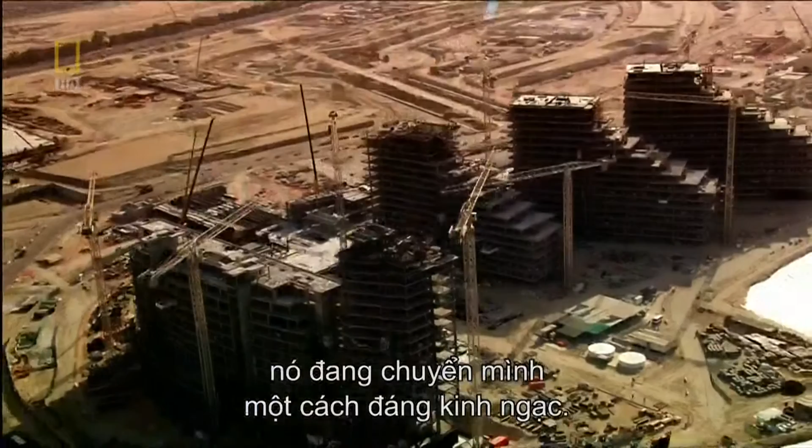Abu Dhabi, the richest city on the planet. It wants to join the City Super League and is undertaking an incredible transformation, building this extraordinary skyscraper, Aldar HQ. Nothing like it has ever been attempted. It'll be a race against the clock. Will this megastructure push even Abu Dhabi to the limit?

Abu Dhabi is in the midst of a construction boom. It's the largest of 7 sheikhdoms known as the United Arab Emirates. Its capital, also called Abu Dhabi, is the richest city on earth. Its ruler, Sheikh Khalifa, has a cool $875 billion in the bank and an audacious spending strategy to match. He wants to transform the skyline and compete with the international elite of London, New York, and Hong Kong.

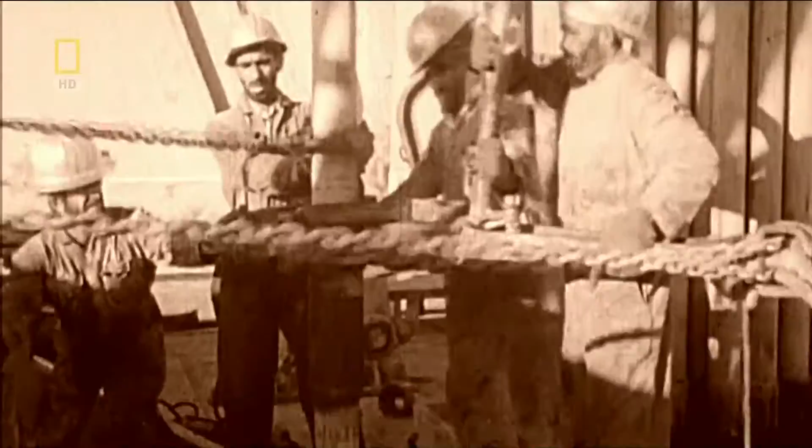But this is not the first time the Emirate has stood at the crossroads. Just decades ago, Abu Dhabi was a desert backwater, until the discovery of oil in 1958 brought unimaginable riches to its ruler, Sheikh Zayed. As the petrodollars flowed in, he converted the shell houses into high-rise, and the traditional way of life was swept away. Today, Abu Dhabi is a thriving metropolis, sitting atop the world's 5th largest oil reserve. But black gold alone cannot put this city in the Super League. To do that, Sheikh Khalifa must lure big business and tourist dollars. Abu Dhabi must expand to thrive.

To put Abu Dhabi on the world map, fledgling property developers Aldar plan a whole new micro-city, Al Raha Beach. It's an ambitious proposal. At 11 kilometers long and almost a kilometer wide, this city on the sea will be the biggest project ever attempted in Abu Dhabi's history. Mohammed Al Mubarak is in charge of delivering this audacious development. The vision of their highnesses and the vision of Aldar was to create this almost mini city where people can live, study, play, and work in one destination.

Al Mubarak must attract investors if Al Raha Beach is to succeed. So to launch the project, he commissions a signature skyscraper. Creating an iconic structure on Al Raha Beach was of vast importance on basically putting Al Raha Beach on the world map. Al Mubarak sets Lebanese architect Marwan Zgheib the task of designing an icon that raises the stakes even higher. The building will become Aldar's headquarters in the heart of their colossal development.

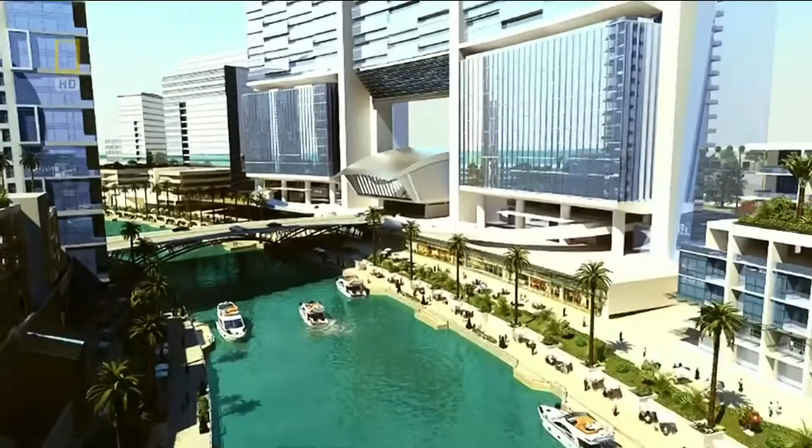But creating something new in a land where the iconic is the everyday won't be easy. Neighboring Emirate Dubai has taken center stage with a number of headline-hitting projects. The world's tallest skyscraper, Burj Khalifa, the Palm, and the World, and the emblematic Burj Al Arab. To stand out from the crowd, Zgheib knows he must redefine the extraordinary. Simple can be powerful sometimes, especially in architecture. You can see it since the pyramids of Egypt. Most of the iconic buildings are very simple buildings.

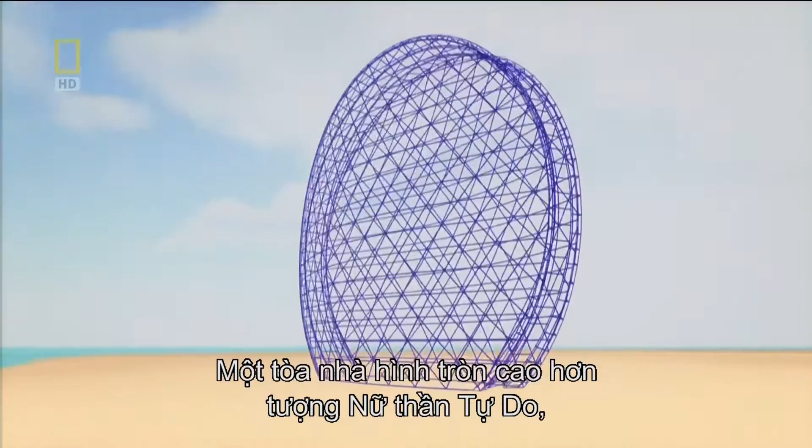But it isn't until Zgheib is relaxing on a plane that he has a brainwave. But I couldn't sleep, so it was a moment of relaxation, you know. And then the idea came simply. So I took a pen and I drew it on a sketchbook. The design is simple but daring. A round skyscraper taller than the Statue of Liberty, with a curved glass skin covering the area of 4 football fields. To be honest with you, the moment I imagined it, I knew it was a winning concept. I knew it was something different.

In fact, the design is so unusual, Al Mubarak initially doesn't know how to react. And when I first looked at the MZ design, I was a bit confused in the beginning, to be honest with you. I felt like I was looking at a comic. I felt that this was a flying saucer and basically it landed on Al Raha Beach. And I just kept on staring at it for like another 15 minutes. And after 15 minutes, I just fell in love with it.

Zgheib's design is inspired by nature. 2 giant circular curved walls of glass mirror an open clamshell. Architecture is nothing but imitation of nature. At the beginning, the idea was so geometrical, very pure. It's like a seashell. The seashell has deep meaning for Abu Dhabi with its seafaring heritage. But a circular design poses a problem. Just like a coin that stands on its edge, it risks being unstable. The circle must be balanced.

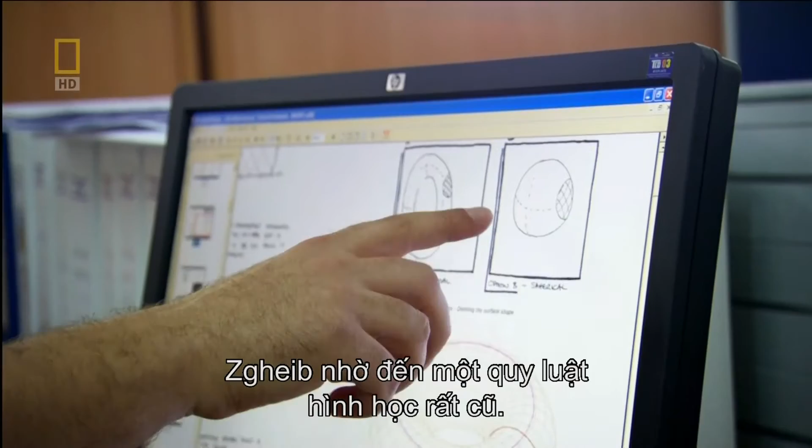So Zgheib turns to some very old-school geometry. The real challenge of the circular facade was to find the 2 points where the building should pose on the ground. And for that, I had to go back to one of the oldest rules in architecture, proportion. When you have a circle, you can divide it into a pentagram.

And that pentagram, in fact, is a representation of the cosmic body of the human being. So you can put a man in that pentagram, the man and the universe. So the pentagram will define the 2 points of the circle where the facade will lay on the ground. And this will create the perfect balance.

It was the same thinking that led 16th century philosopher Heinrich Agrippa to draw man as a pentagram inside a circle, and has helped architects to proportion buildings for centuries. But it's one thing to sketch a circular skyscraper and another to bring it to life. There is no precedent. A building like this has never been attempted before. Zgheib must find out if his design can actually be built.

We knew from the first moment that the engineering of that building is not going to be a simple traditional thing. But it's not the skyscraper itself that poses the first major challenge. It's the proposed site. They wanted to show me the site, but all you can see was the sea, nothing but the waters. Unbelievably, the solid ground required for Aldar HQ does not yet exist. The desired location is 700 meters out in the Persian Gulf and 8 meters underwater.

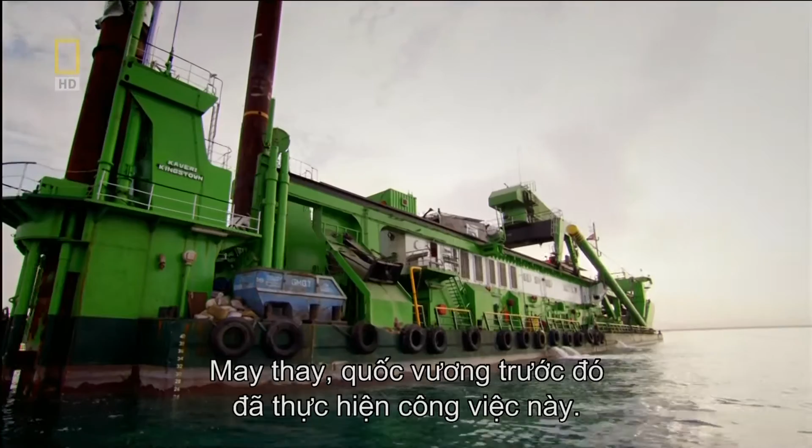Dredging sand from the seabed is one solution, but fortunately, the last sheikh has already done the job for them. Whilst cutting a shipping channel in the late 1970s, Sheikh Zayed created an island of discarded sand. Luckily for the engineers, it's just across the water, so they decide to move all 20 million cubic meters of it. A fleet of cutter dredgers eat their way into the island. These are no ordinary dredgers. It takes an enormous claw layered with 48 reinforced steel teeth to slice through the hardened sand.

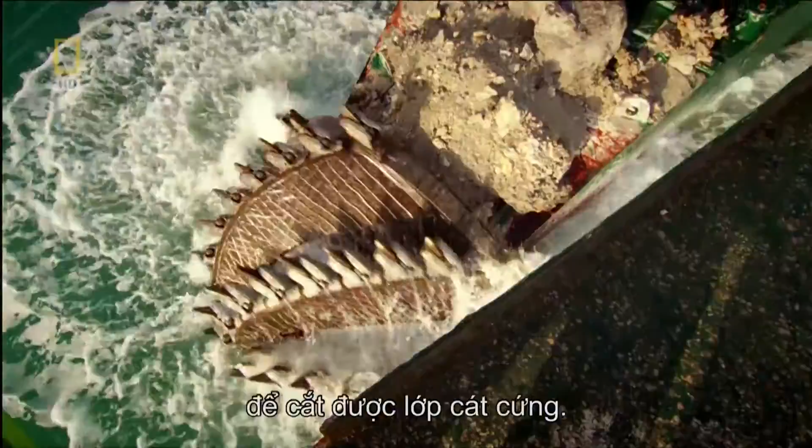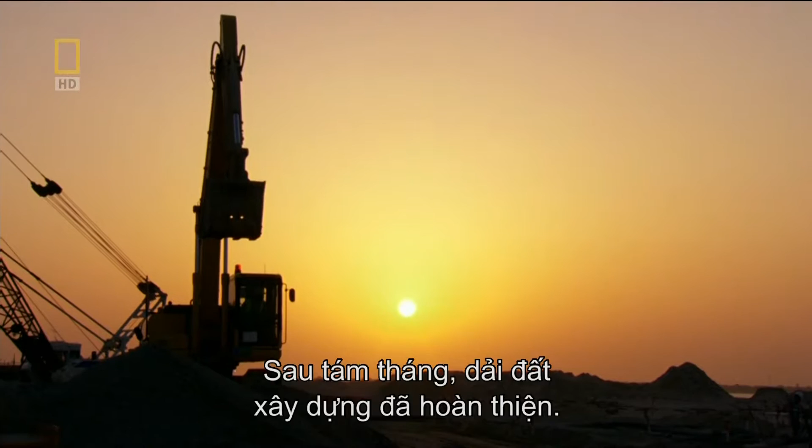We go forward from there. Good. We mapped out the program, and I realized that basically from this blank sheet of paper, we would have to start piling within 2 months, which is absolutely unprecedented for any building, but certainly a building which is of a unique geometry. Aldar want their skyscraper completed by an astonishing deadline. In just 30 months' time, the eyes of the world will be on Abu Dhabi when it hosts its first Formula One Grand Prix.

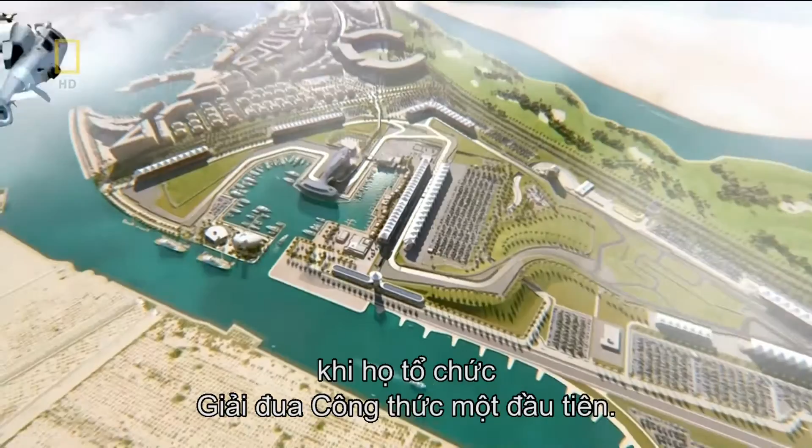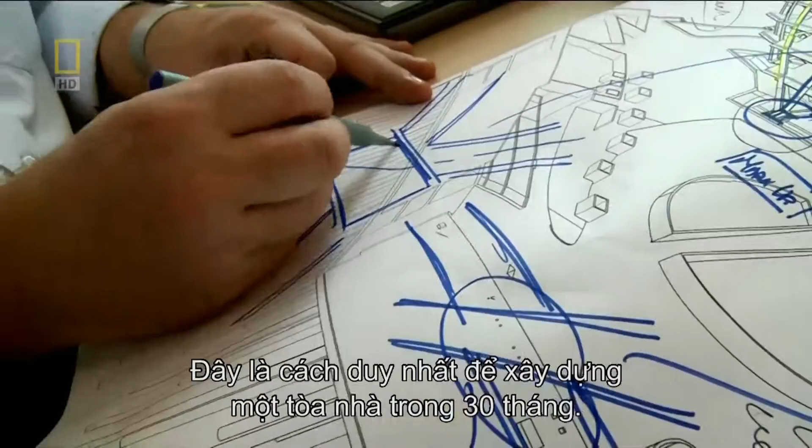The racetrack will be on its own designated island, complete with hotels and theme parks. And Aldar are building the lot. The international press and tens of thousands of visitors will descend on the city. It's the ideal opportunity for Aldar to showcase their new HQ. But to stand any chance of meeting this target, the team will have to pull out all the stops. Normally, blueprints are complete before construction begins. But Aldar HQ's deadline means this is impossible. Given the programme challenges with this project, the only solution was to overlap the design with the construction. It's the only way the team can design and build a radical skyscraper in just 30 months.

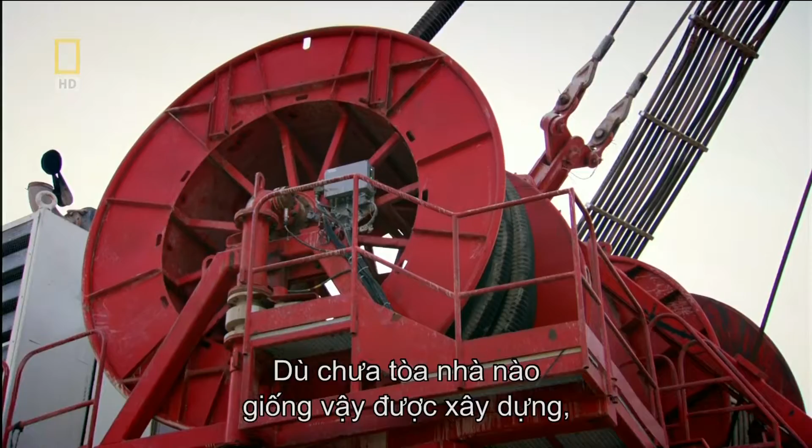With the clock ticking, the ground is prepared for the foundations. They will carry the loads of Aldar HQ into the ground. But there's a problem. Working on blueprints one step ahead of construction could be risky. The speed at which the construction had to be undertaken meant we had to get the foundations in before we'd fully resolved what goes on above. Even though nothing like Aldar HQ has been built before, the engineers must take a leap of faith and start laying the foundations without a full set of plans. It put tremendous pressure on the team. Problems can't remain problems for long. We don't have the luxury of time to sit around and contemplate what the solutions might be.

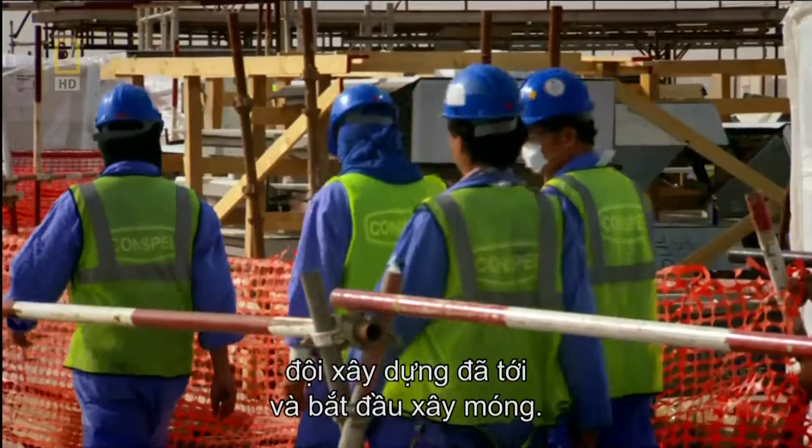Just 1 month after design has started on Abu Dhabi's round skyscraper, the construction team arrive on site to begin foundation works. For construction manager Miles O'Sullivan, the schedule is a shock. With the design not complete and being told you're going to pile in 1 month, almost crazy. But it's not just the first deadline O'Sullivan has to worry about. Aldar HQ's round curved shape presents an enormous sail-like area when wind strikes. Wind tunnel tests must be done to prove the foundations can take the strain. But the results won't be back until work has already started.

Abu Dhabi is regularly hit by high-pressure winds that sweep in from the Persian Gulf. But building Aldar HQ so close to the sea will put the foundations under another kind of pressure. Digging for Aldar HQ is very similar to digging here in the sand. What you get as you dig down is you'll get to see the groundwater starting to surge through the sand. And in fact, it's that groundwater that we see start coming through the sand here that's creating the pressure and obviously creating the issues for us when we do the construction.

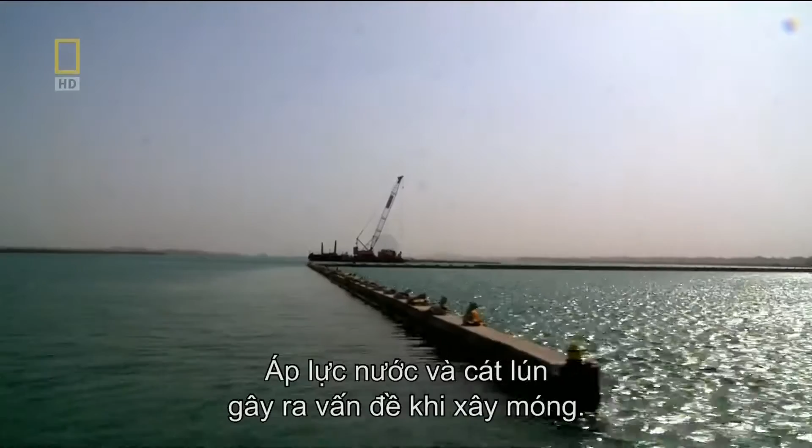The upward pressure of the water and the loose sand pose a problem for foundation construction. Before excavation can begin, the team must build a solid barrier called a diaphragm wall or D-wall. It's a concrete barricade formed of interlocking panels which socket into the bedrock and reach 16 meters below the surface. The D-wall holds back the loose sand and the surging seawater, ensuring the ground inside the barrier can be removed.

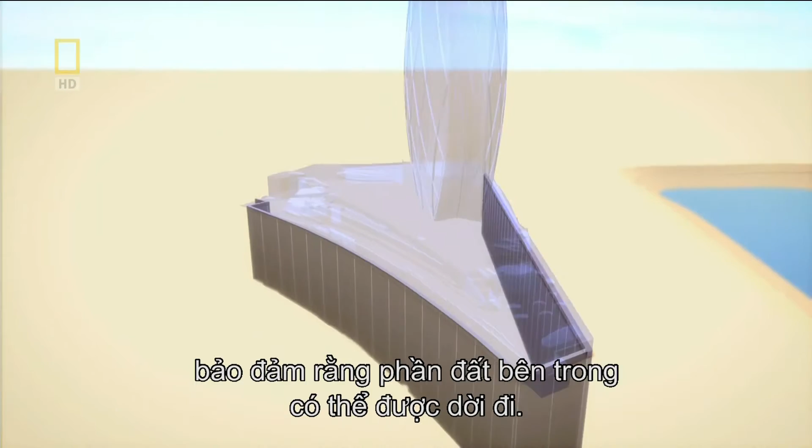These areas here, what are these? The D-wall must be built before the foundations can be laid. But with the blueprint above ground a work in progress, the team can only hope that over-engineering the foundations will make them strong enough.

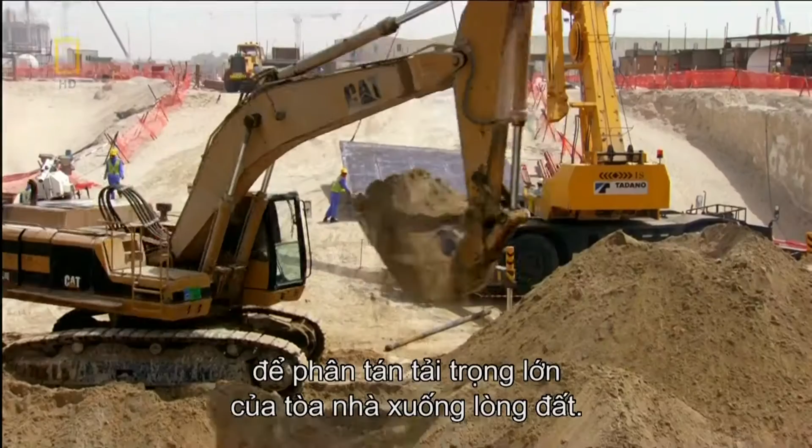The design calls for about 400 concrete piles that work in two ways. Half of the piles rely on friction with the ground to secure the structure to the rock and sand below, whilst the remaining piles drive deeper into the rock to dissipate the building's immense loads into the ground. On site, D-wall construction begins. It's the same process ongoing at this Abu Dhabi construction site.

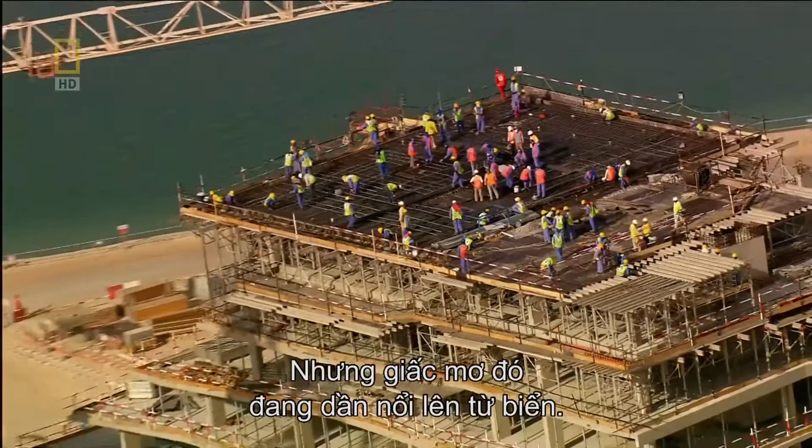Until recently, Al Raha Beach was just a vision for Aldar's Mohammed Al Mubarak, but the dream is slowly emerging from the sea. Seeing that land come up, seeing the amount of work and the amount of staff we had on the ground to make sure that was going to be done, that was like watching Rome being built.

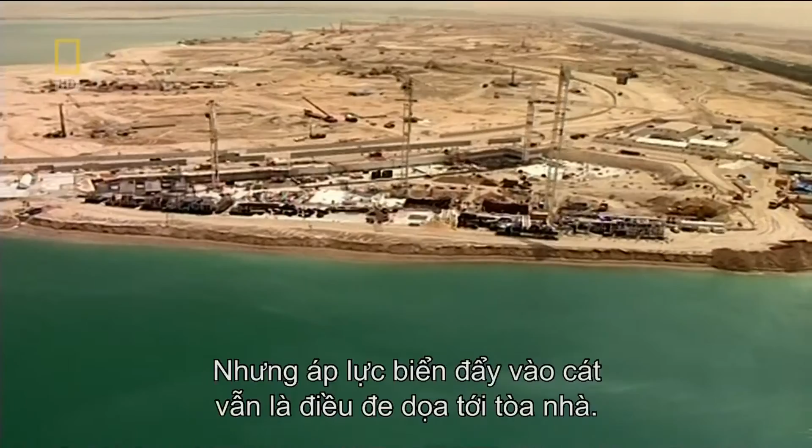The D-wall and concrete piles create a firm foundation upon which to build Aldar HQ. But the force of the sea pushing up through the sand still poses a threat to the skyscraper. A great way of demonstrating the problems we faced at Aldar HQ with the groundwater is in imagining that this bottle here is Aldar HQ. And as I push the bottle down, you see forces are exerted on my hand. And in fact, that's the groundwater trying to push the building out, trying to push Aldar HQ out of the building site.

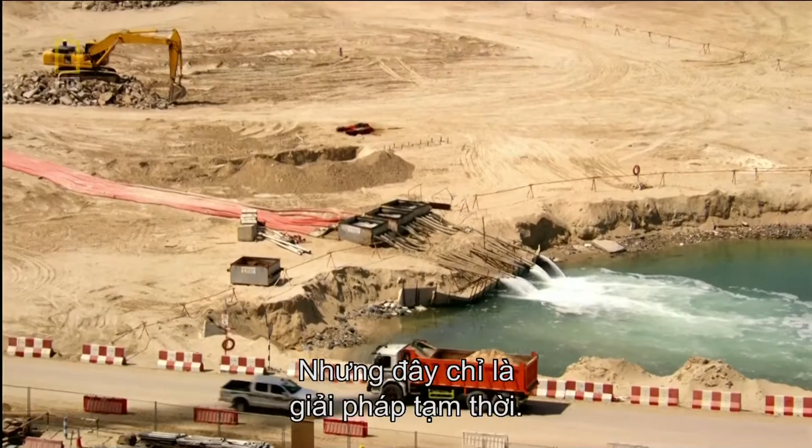To keep the site dry during construction, water is sucked out of the sand and pumped out to sea. But that's only a short-term solution. To protect this skyscraper in the long term, the team need an extra defense. It's a giant slab of concrete called a raft. It creates a barrier against surging water, stops the piles from punching up through the building, and acts like a snowshoe to evenly distribute Aldar HQ's 59,000-ton weight into the ground.

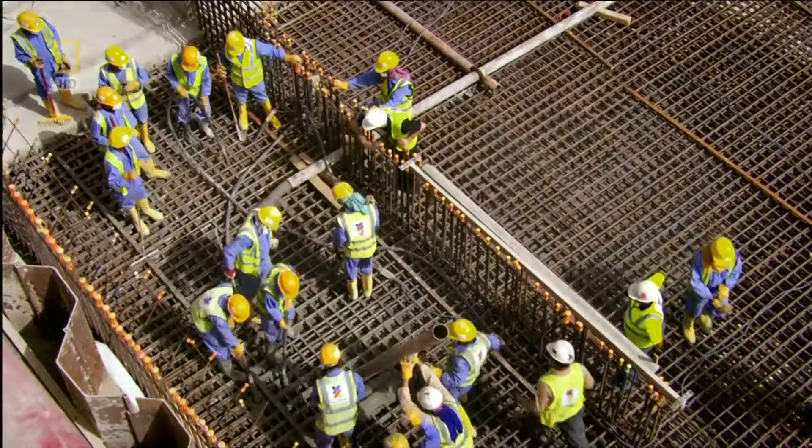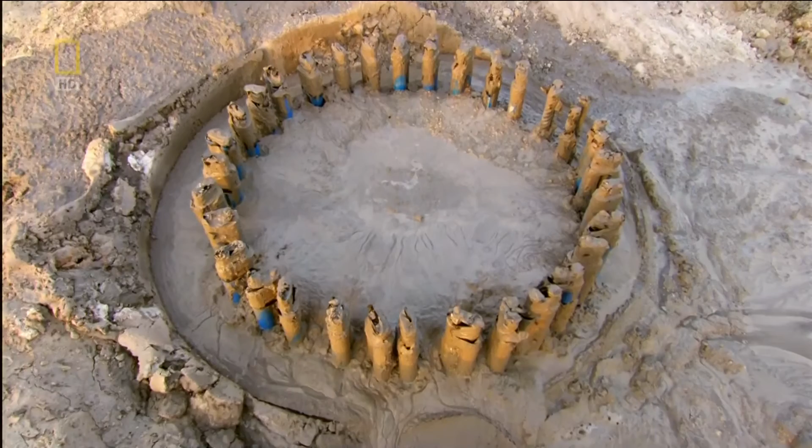The raft construction for Aldar HQ is 12,000 cubic metres of concrete, which is a 30,000-ton structure. It's a huge element. With 2,000 truckloads of concrete to pour, it's a job that continues into the night. But engineers are just getting to grips with the severe forces that will affect the piles. The unique shape of the skyscraper will capture wind like the sail of a yacht. There are no guarantees the foundations will be strong enough to cope with the loads.

The advanced construction works had to commence so quickly that we didn't have time to do the wind tunnel test. It was important that we did one, primarily because this is a unique shaped building. Gibbons calls upon wind engineer Roy Denoon in Colorado, USA. He puts a scale model of the HQ through its paces in his high-tech wind tunnel.

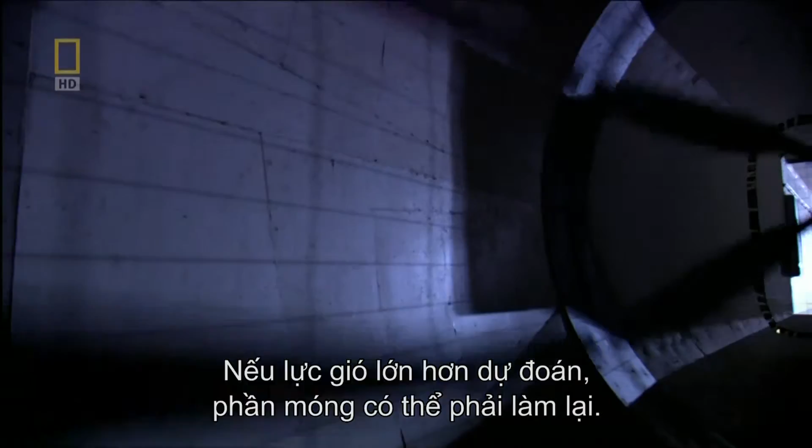Right at the start, Craig Gibbons actually called me and said, "We've got something really unusual coming up. Can you take a look at it and give us your first best guess of what the wind loads might be? Give us some guidance on how to get to some loads for the foundations, because this is running on such a fast-track schedule." Knowing that Gibbons is already building the foundations, Denoon wastes no time in firing up the fans. If the tests reveal the wind loads are higher than predicted, the foundations already in the ground may have to be redesigned. To be putting in the foundations before we could finish the wind tunnel testing, that always gives us a little bit of cause for concern.

Denoon is right to be worried. He knows how high-altitude wind impacts on very tall rectangular skyscrapers. But Aldar HQ's lower height means another type of wind is the threat. When we look at the really extreme wind speeds in the Middle East and in this region, we find that the highest, what we call gust wind speeds, the short events, are caused by thunderstorms.

Abu Dhabi may appear sun-soaked, but during the spring, the intense sun heats the moist air, causing spectacular thunderstorms. Wind speeds can escalate up to 137 kilometers per hour. The key issue with thunderstorms in this region is that they give the absolute highest gust wind speeds.

Now, for the very, very tall buildings, that's not too critical because they occur down low. For Aldar HQ, they were really critical. Thunderstorm winds are strongest between 50 and 150 meters above ground. Aldar HQ is right in the danger zone.

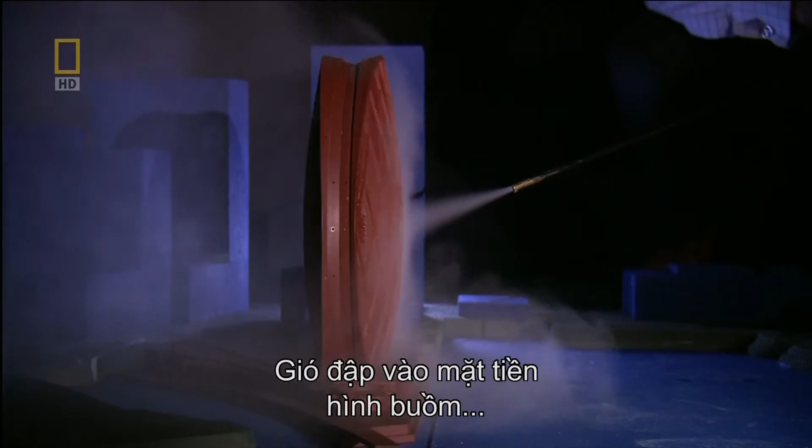In advance of getting the wind tunnel tests, we'd speak a lot with the wind tunnel engineer, Roy Denoon. And Roy would wind me up about the kind of loads he was getting, etc. And knowing that the piles were going in as we spoke. Wind hitting Aldar HQ's sail-shaped facade puts the building's narrow base under pressure. The wind wants to twist the structure. The foundations must be strong enough to resist these forces.

A little bit more smoke there, Doug. And if you could just crank the speed up in the tunnel just a touch. A little bit more. Denoon analyzes the wind tunnel data. Fortunately for Gibbons, it's Denoon's jokes that have no foundation.

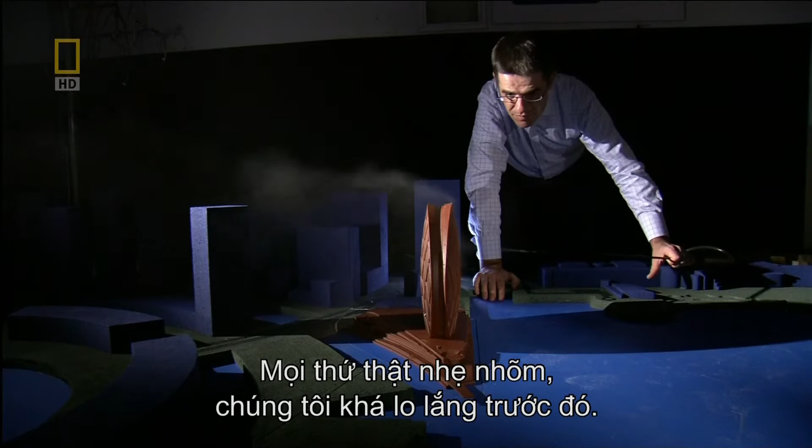When I got the results back from the wind tunnel test, and they were within an absolute whisker of my early predictions, I was just delighted by that. I couldn't wait to get on the phone. They were pretty relieved, I think, because I think they'd been sweating on it a bit. It was a great relief to know that Roy was just winding me up, and that in actual fact the wind loads were very much in line with what our expectations were. The results of the wind tunnel test are great news, but the relief is short-lived.

Now the structure needs a super strong backbone or core. But again, conventional building won't fly with this design. For Aldar HQ, one core wasn't enough. We needed two cores, in fact, to take all the loads down into the structure. Aldar HQ needs two concrete cores for extra stability. The twin spines rise a full 125 meters from the concrete slab to level 23. Reinforced with 6,500 tons of steel, these cores will transfer the loads into the piles. But to channel these forces safely, the concrete must be cast without any flaws.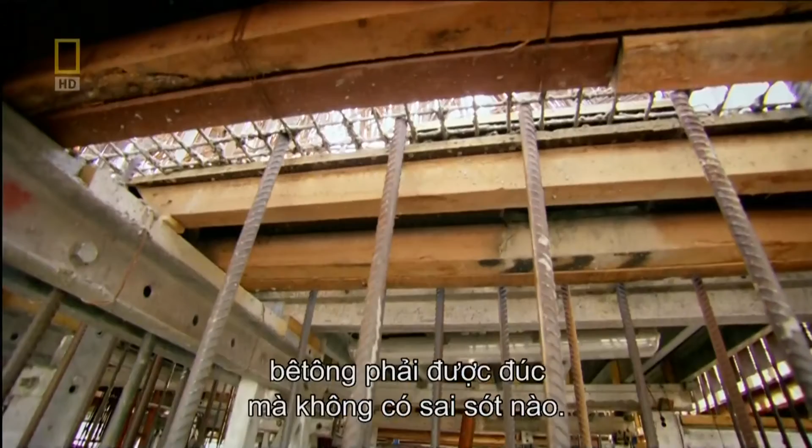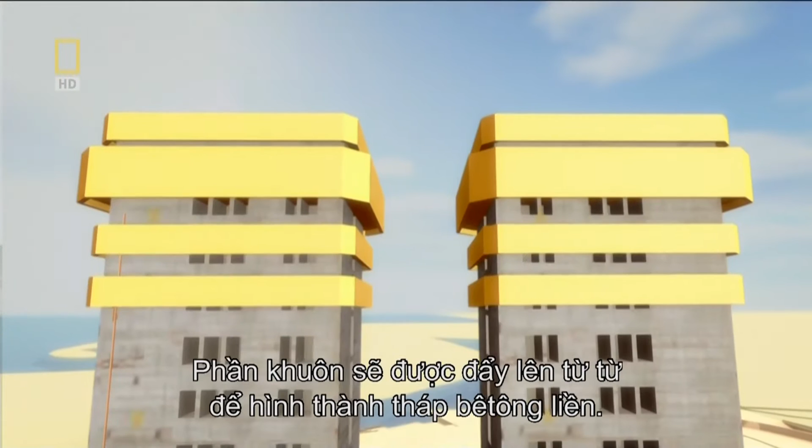They need a way to build the cores as two single pieces of concrete. The answer? To slip form. It's a clever way to build big concrete towers. Liquid concrete is poured into a giant mold, which forms the shape of the structure. The mold slowly climbs up the core as it's cast, forming a single concrete tower without any joins. Seamless concrete will ensure the HQ's cores are strong. But these 125-meter backbones must be built in only 6 months.

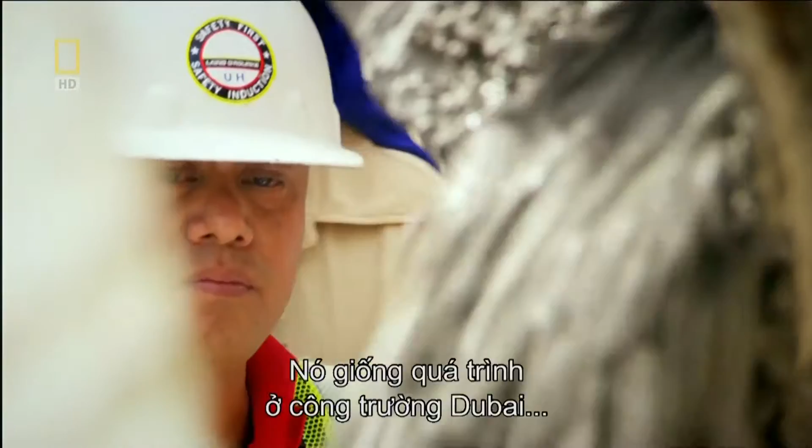It's the same process ongoing at this Dubai construction site, led by the Aldar HQ team. We are calculating how much per hour we need to climb, and then how much concrete we need to place in every hour. Slip form is fast, but on this schedule it's not fast enough. O'Sullivan has a trick up his sleeve to speed up construction. We set a challenge to both cores, who could get up there first. More, get up. The teams battle to reach each level before the other.

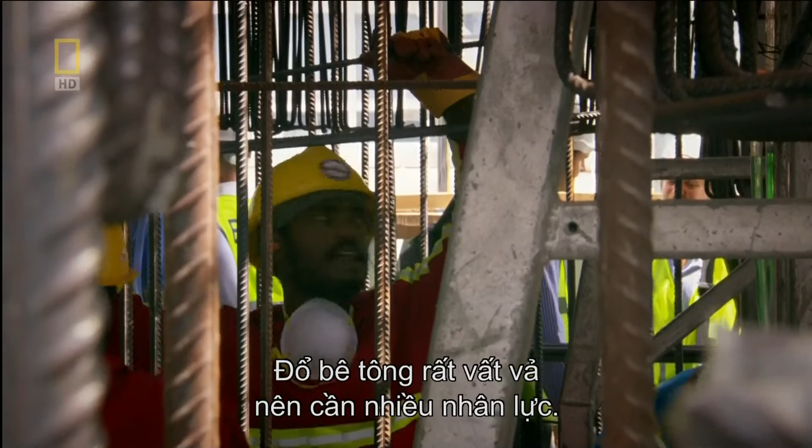The cores grow meter by meter under a constant cycle. The concrete is released and poured around the steel reinforcement. Hydraulics anchored to the structure raise the mold or shutter so that the next layer of concrete can be poured. The manpower is a key focus because slip forms are very labour intensive. You need to make sure that the guys are on deck, they're there at the right time, they're doing the right works.

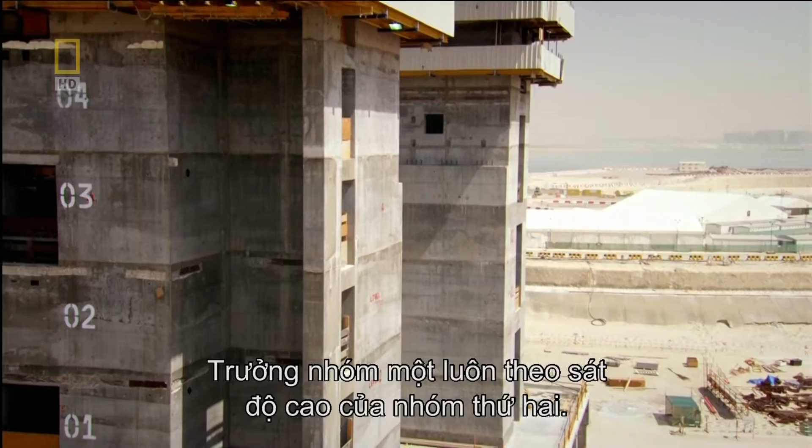4 months into core construction, the two teams are neck and neck in the race to the top. Core 1's team leader keeps a close eye on Core 2's height. It's been my benchmark, so if I'm doing better, I'll be ahead of them. A lot of pressures are there. My boss is telling me, do this, go up, go up, go up. But it's good, the pressure is good. Core 2's leader also feels the strain. I'm working 24 hours today. I try to finish earlier than the other core.

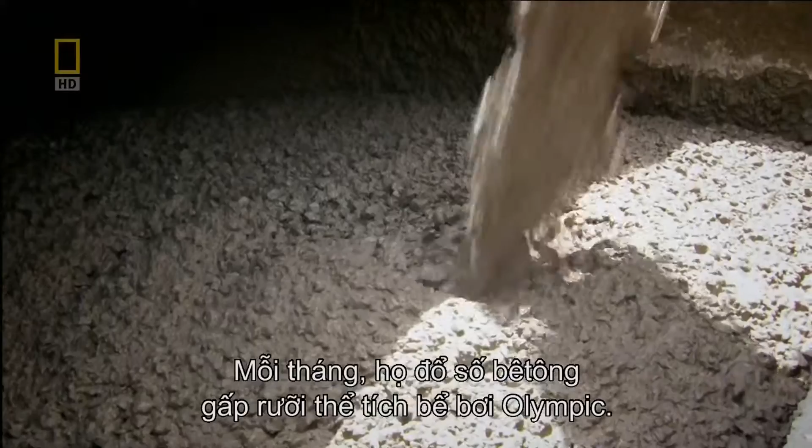Every month, the builders pour enough concrete to fill 1.5 Olympic swimming pools. But the teams aren't home and dry yet. There's still a challenge to finishing. Cores are renowned for going up quickly and sometimes having problems, so there's a lot of coordination effort that goes in to make sure that they do go up on time. We had structural steel elements to cast in. We had crane connections to get right.

After just 6 months, the 2 cores are approaching the top. Core 2 is only a metre or so behind, but Core 1 push ahead to victory. Core 1 won the race. It's really good to know that we're on top. For O'Sullivan, the contest to build the cores in record time has paid off. A lot of planning goes into the cores. To see it come off, a fantastic feeling. But it's only a stepping stone, the core construction. There's a lot more to go on.

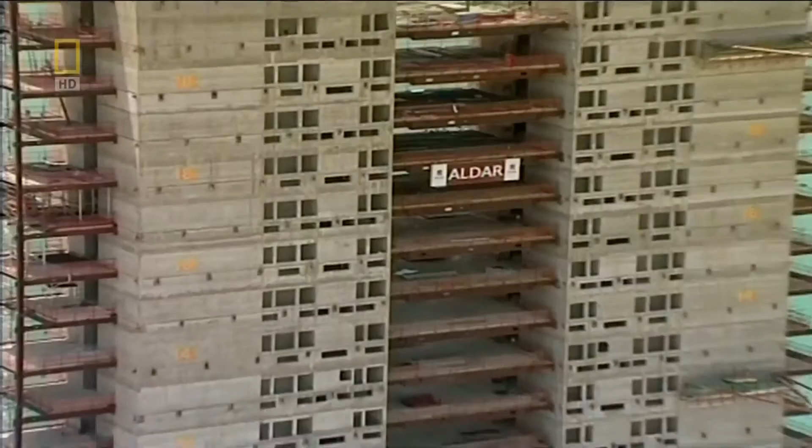The team have so far overcome the obstacles to bring Aldar HQ to life. But now they must face their most complex challenge to date. 1 year in, and Abu Dhabi's radical skyscraper is beginning to take shape. But with only 19 months to the deadline, the engineers must crack how to build Aldar HQ's vast external shell.

The design demands a heavyweight shell to support its wide girth and survive huge wind loads. But the architect stipulates open office space, floor-to-ceiling windows, and panoramic views of the Persian Gulf.

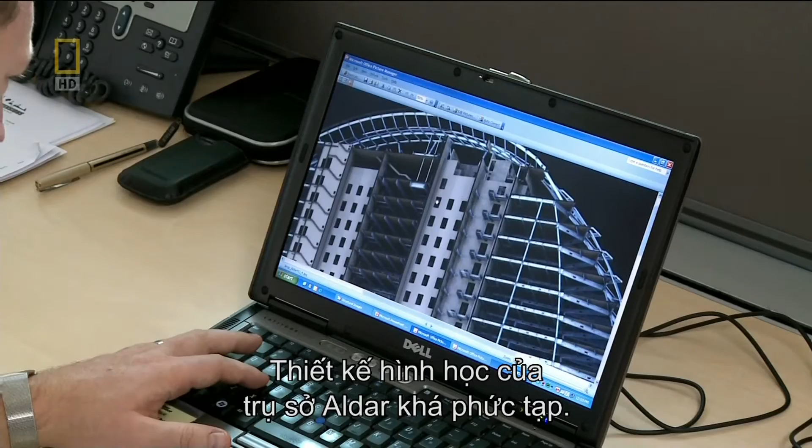In the United Arab Emirates, the shells of rectangular skyscrapers are built with concrete. But the geometry of Aldar HQ's shell is so complex, it must be built with the precision of a Swiss watch to fit together. On this scale, achieving millimetre accuracy with concrete is practically impossible. We knew at the outset a wholly concrete building was never going to work in this instance.

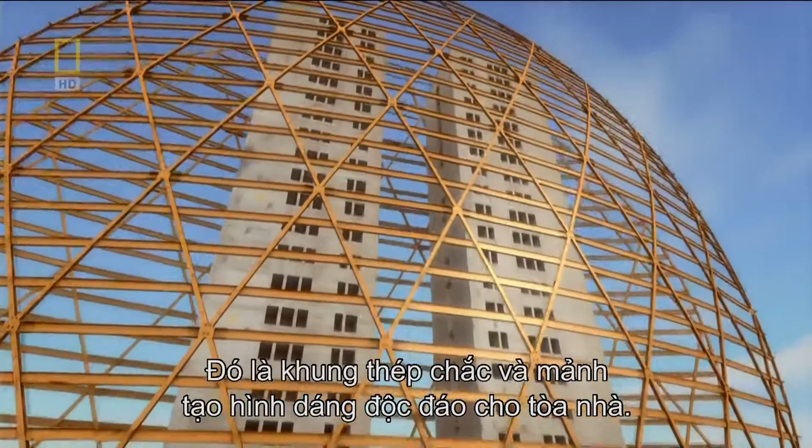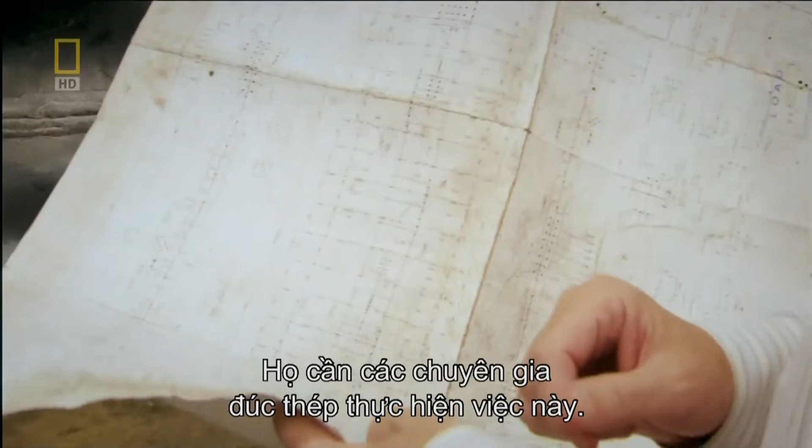The geometry of the building presented a significant challenge to us, but the other challenge was that a diagrid building, or buildings using this diagrid system, had never been built before in Abu Dhabi and the UAE. Let's have a look at it if you don't mind. It'll take expert steel fabricators to pull this job off. When we first saw the design, it was something that we knew we had to put our most experienced guys on. The structure's very, very complex.

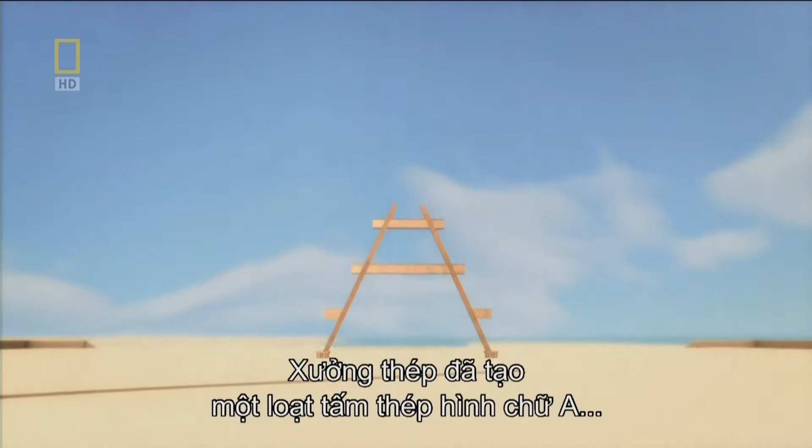The army of fabricators work in shifts around the clock to cut and weld 2,500 tons of steel. The factory is building a series of A-shaped steel sections, weighing up to 30 tons each. They will connect together to form the structure's signature curves. But if manufacturing these giant A-frames is not a big enough job, lifting them into position on site will be a major challenge.

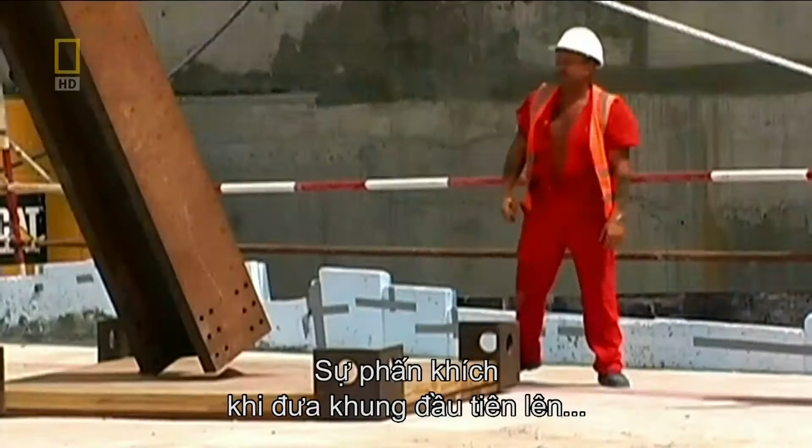Great to see the steel arrive for the main diagrids, the main columns to the structure. Huge sections. The thought of actually starting the steelwork, some 18 months after we started the job. Fantastic. But excitement of the first A-frame delivery is soon replaced with trepidation. Lifting these monsters will be a precision job, and tensions run high.

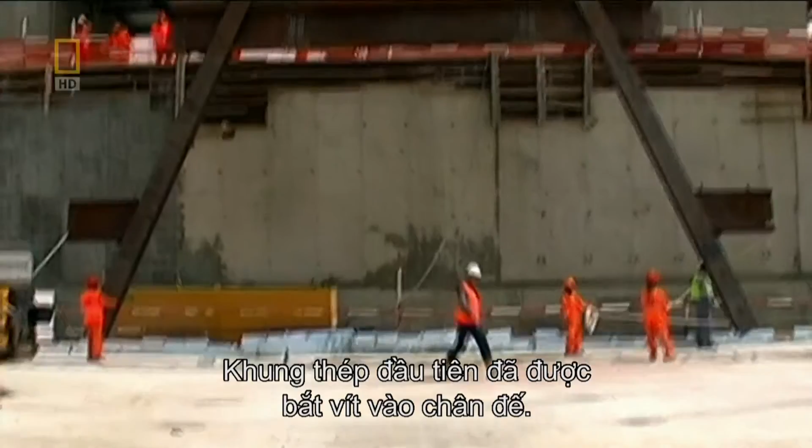When we rigged the first A-frame up, you've got to put all the chains on it. It would take maybe an hour to rig it up, and everybody's then thinking, I hope this is going to work. Everyone is on tenterhooks. Now is the moment of truth. The A-frame is lifted off the ground. There was a big ah from the crowd when it went in. The first exoskeleton section is finally bolted to the base plate. To see one go in, an amazing feeling. First A-frame up, again a milestone achieved, but then a lot more to go.

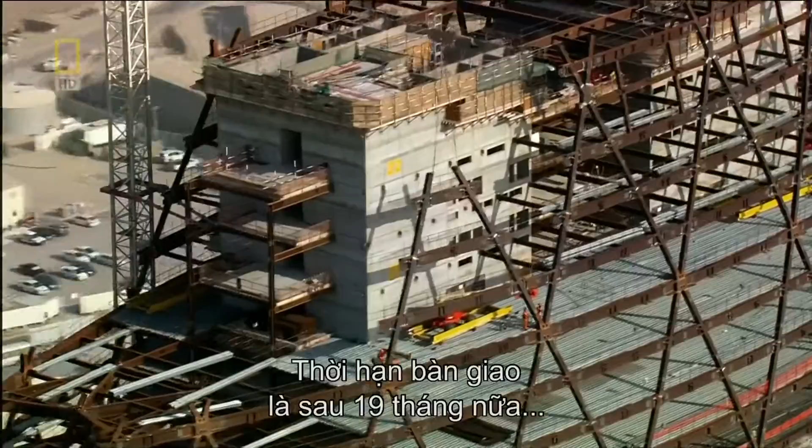Another 99 A-frames must be fitted to form Abu Dhabi's unique skyscraper. The handover date is now just 19 months away. So the team must now focus on the HQ's interior. The structure needs an alarming number of restrooms, 85 in total. This is no weekend DIY job. It'd take an army of plumbers and time the schedule cannot spare. So to fast-track the task, the team innovate again with prefabricated washroom modules or pods.

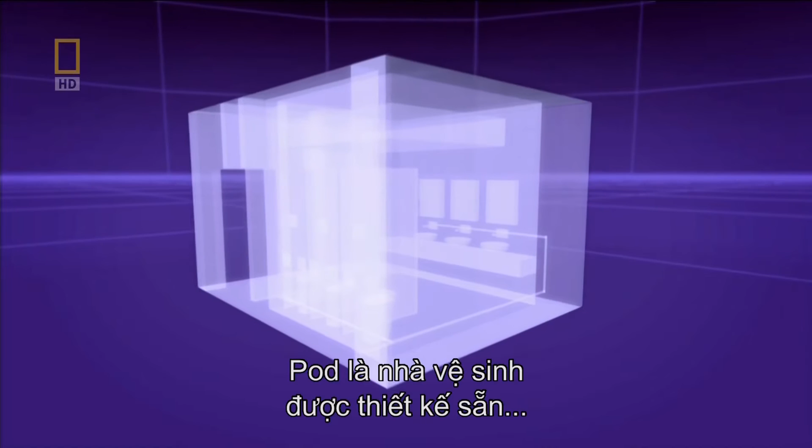A pod is a factory-made restroom, complete with lavatories, basins and mirrors, ready to plug into the building. The team plan to lift these 12-ton pods by crane and lower them into the cores like a giant game of Tetris. Construction is a finely tuned sequence. The pods have to be in before the exoskeleton blocks access to the cores. Aldar must approve the design fast. But there's a problem.

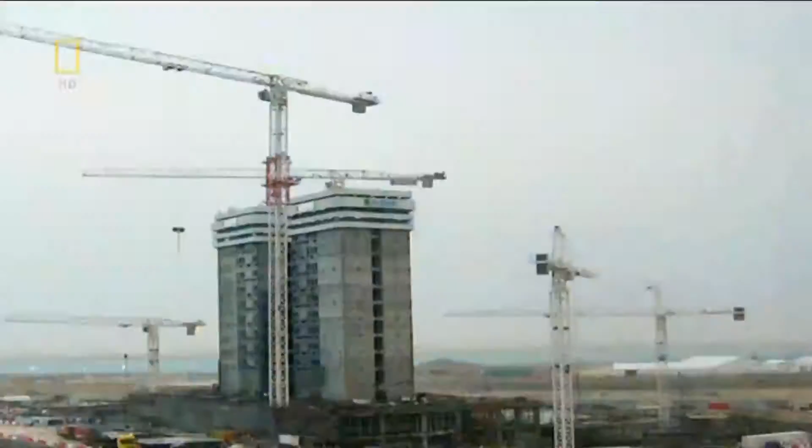We produced a lot of visuals and graphics which we had signed off. Then we actually built the pod. We went to look at it at the factory and a lot of people thought that's it. But Aldar unexpectedly rejects the pod design. It's just too ordinary for such a futuristic skyscraper. It will take months to remodel, and the exoskeleton can't wait. The whole plan could go down the pan. The only option is to leave out 2 roof sections and drop in the pods later, but this has its own dangers.

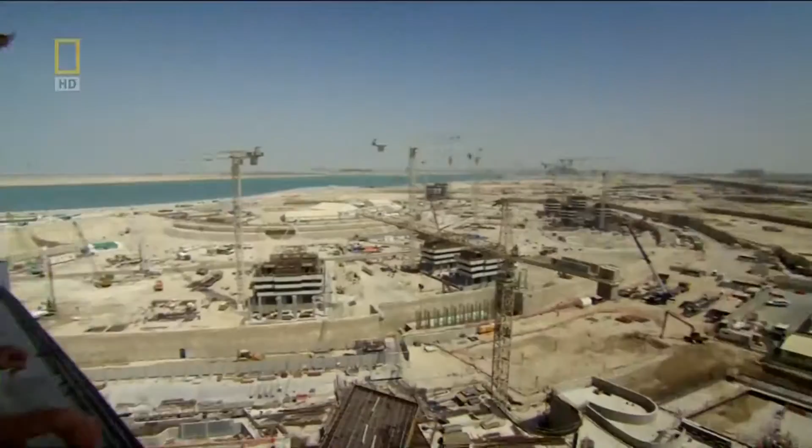With zero hour looming, the team must now wrap the building's skeleton with a glass skin. And no one has ever built a glass facade like it. The geometry of Aldar HQ is highly complex. Two giant bowed facades cover an area the size of 52 basketball courts. A third narrow surface joins the round facades like a zipper, arcing an extreme 290 degrees from one side to the other.

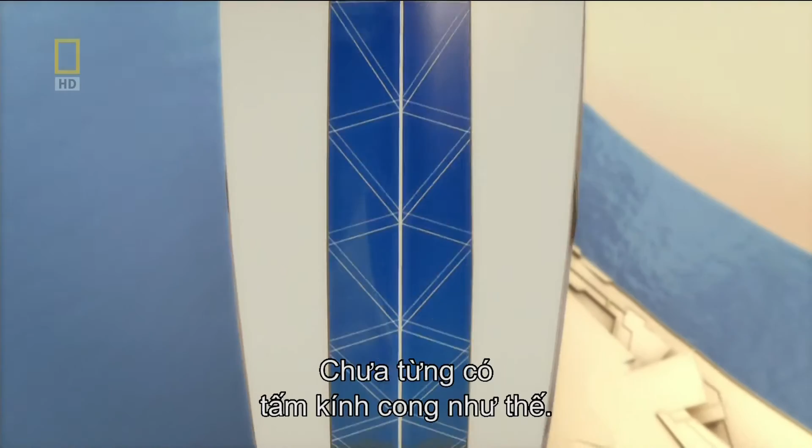But curved glass like this doesn't exist. The engineers need another plan. The secret to covering a curved surface with flat glass is its shape. Square glass isn't an option. Squares can only bend in one direction at a time without distorting. Aldar HQ needs triangles. They can pivot on three axes and seamlessly join with their neighbors. To form these complex curves, it'll take 25,000 individual panes.

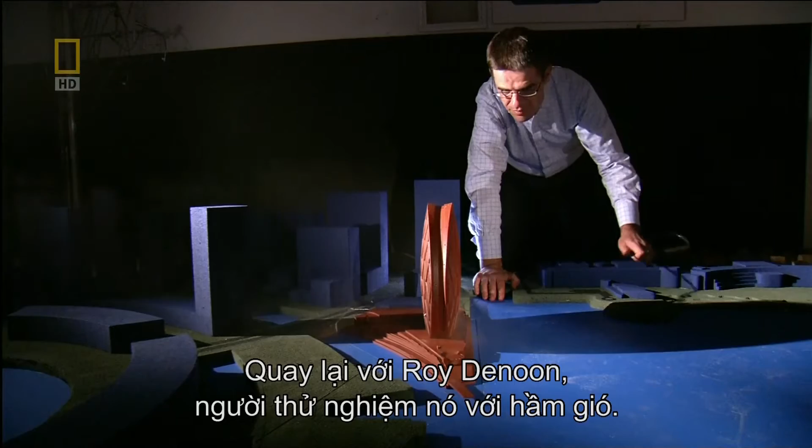But before glass production can begin, the team must know what wind pressures it will face. It's back to wind engineer Roy Denoon, who must test the design in his wind tunnel. When we first saw the design, we knew there was some potential for some quite high glass design pressures. If you under-design a pane of glass, then it will be sucked out of the building. The large facades are most likely to cause trouble.

The biggest loads on the overall building are the winds coming flat into the wide face, so it's capturing it almost like a sail. The wind comes into the centre and spreads out around the building, and where it separates and splits away from the building around the edges, that's where we see the largest pressures. The pressure is like a big SUV hanging off the outside of each panel.

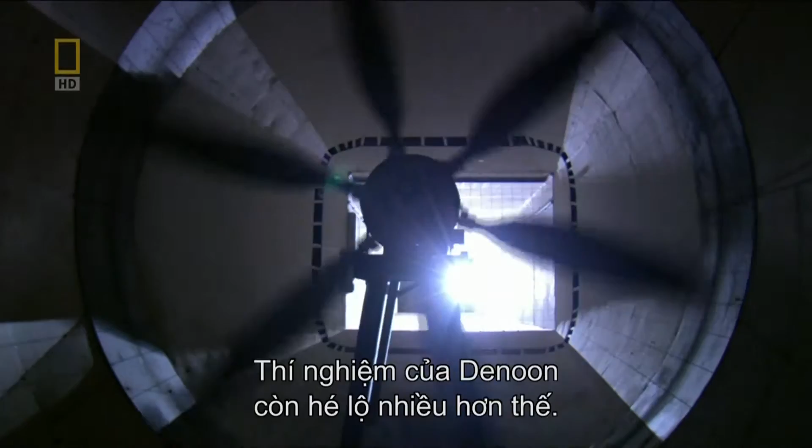But that's not all Denoon's test reveals. The circular shape of Aldar HQ creates another problem. When we initially saw the design, the sharp edges threw up the warning flag that said, look, we can get some pretty large pressures here. Where the wind hits the edge of the narrow strip of glass, it spirals in on itself, creating a vortex.

You see this recirculation of the flow. It separates away and you get this little bubble on the surface where the wind isn't hitting, and then it comes back in to meet the surface again. That's typically an indication that that's where your highest design loads are occurring for your glass. A very, very strong suction force is what that little bubble means. To stop wind sucking glass out of the HQ, each pane must be beefed up with thicker glass and a stronger frame.

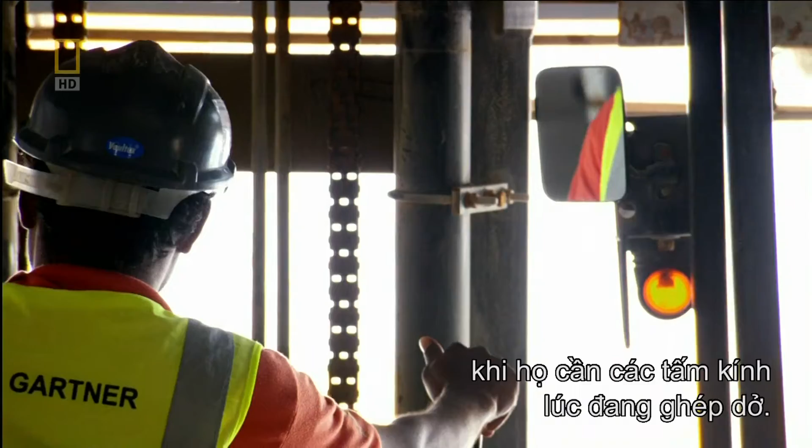But that does nothing to limit the scale of the job ahead. Installation. You talk about 25,000 pieces of glass to do for the building in 10 months. It's a monumental effort. It's a constant battle, making sure that you get the glass to site. But having the glass factory on site is a lifesaver. It made it easier for the site to actually call up on glass. Once they were installing panels and ran out of glass, we were immediately on the phone. Hey, we need more panels over there, so we got them on a truck, and 5 to 10 minutes later they were on the site.

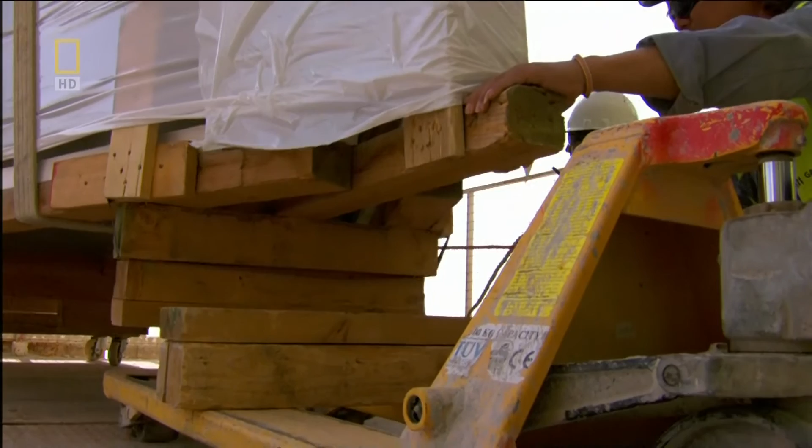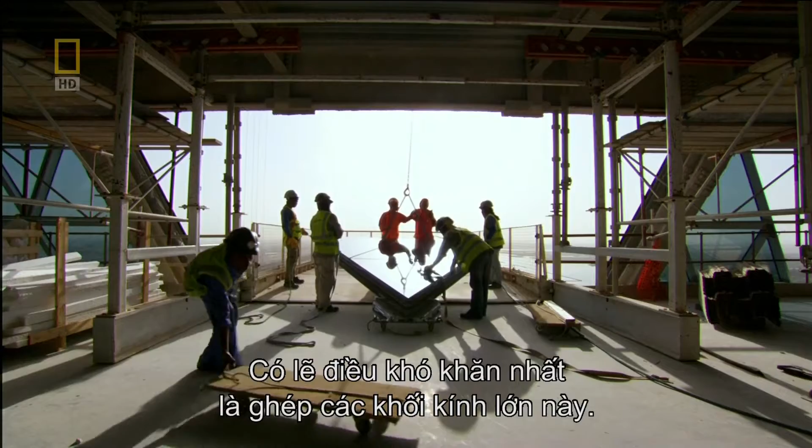The glass factory sends the panels to the site by truck, and the panels are lifted by crane up to the installation team. The constant pressure was the program. The glass is pulled onto the floor plate, but it takes a team of 8 specialist riggers to install the panels. Probably the hardest thing was the sheer volume that had to be installed. Fixing glass on a curve at this height means the panels have to be swung out from a platform that hangs out of the building.

It should be easy, but then this team have Abu Dhabi's wind to contend with. The wind here can just blow in from nowhere. It caused us no end of problems. The glass would start to revolve and spin. We would get a choice whether to lift it, bring it into the building, put it down, or to put it straight back down on the ground. They were decisions that had to be made on the spot. And you don't want a large panel coming down from 20 stories. Just contemplating that, it doesn't bear thinking about.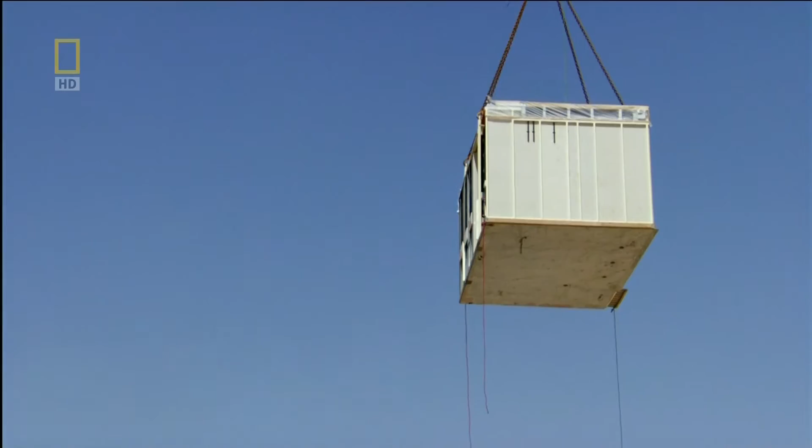The new design is finally approved, and after 10 months, the 12-ton modules start to turn up on site. The pod drops are quite quick. We hook them up, we take them up the 140 metres to the top of the tower crane. The pod can now be lowered into the core shaft. It's a tight fit with just 75 millimetres of clearance. When I saw the first pods in, it was a relief that that saga was over and we'd actually managed to achieve what the client wants.

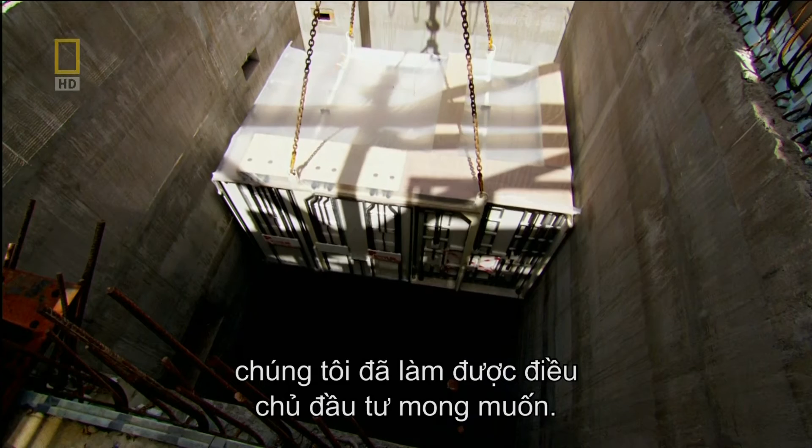The pods are on the move, but the long delay has serious consequences. Finishing the exoskeleton should be a straightforward task. But the incomplete steel roof has sagged out of shape.

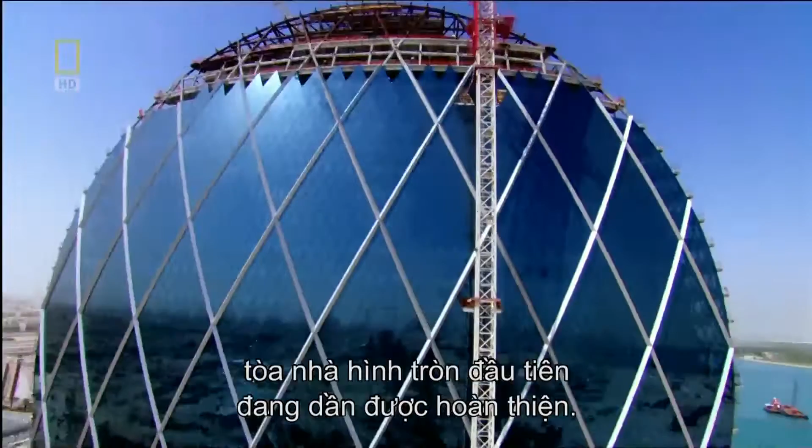Eight months from the deadline, and the world's first spherical skyscraper is fast approaching completion. But with the end in sight, construction hits a serious snag. The delay in fitting the washrooms into the cores has forced the team to leave the roof arch open, causing the steel to slouch out of shape.

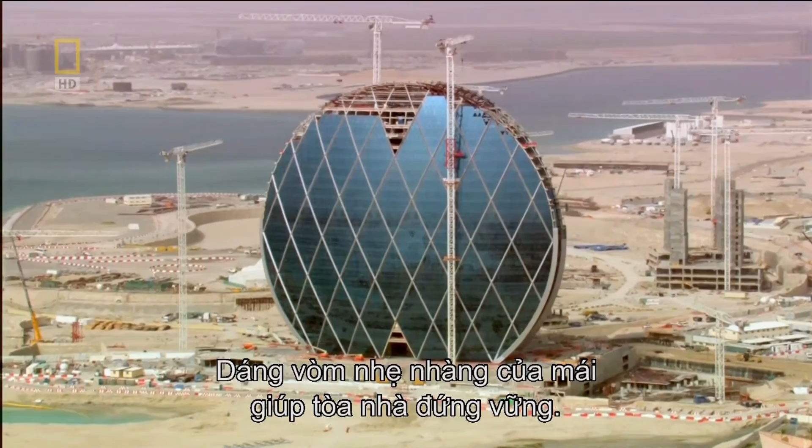The arch of the HQ's lightweight roof is the key to its strength. Its curves evenly distribute the forces down into the foundations. But if any elements of the arch are missing, the forces cannot flow away. The roof will sag under the weight. To discover how serious the slump is, the steel is surveyed.

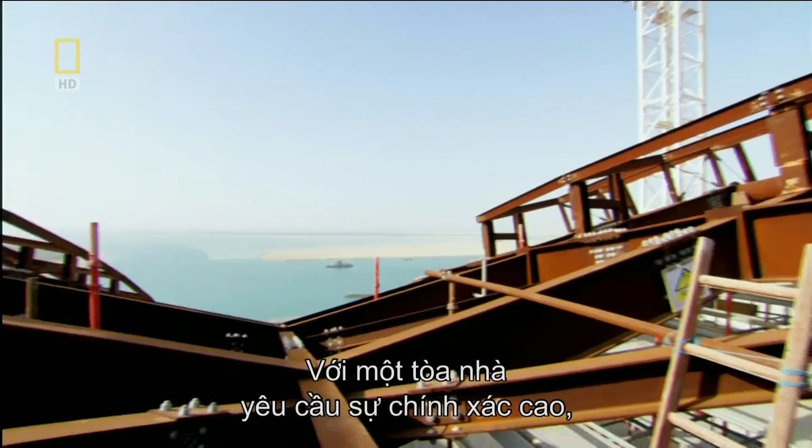I made a phone call to our site supervisor, Bob, and asked the question of what the actual sag was recorded, expecting it to be around about 50, 60 mil. When we got the figures of 150 millimetres, I was a little bit shocked. With a building that relies on precision engineering, 150 millimetre sag is a huge problem. The roof will not slot together. The brackets to connect the remaining 40 glass panels will be out of alignment.

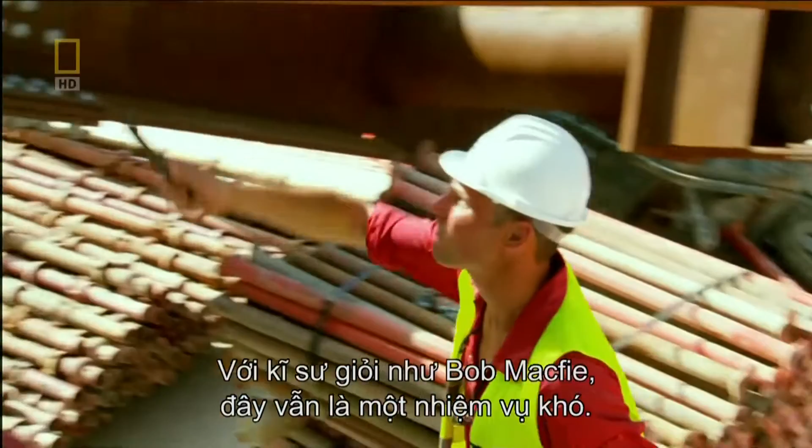There is no time to redesign. The team have to somehow make the roof steel fit together. The only way is to lift the entire roof into position, and it weighs a staggering 200 tons. Even for experienced steel engineer Bob Macfie, this is a serious undertaking. I hate it when you start waking up thinking about your work. I've never liked to do that.

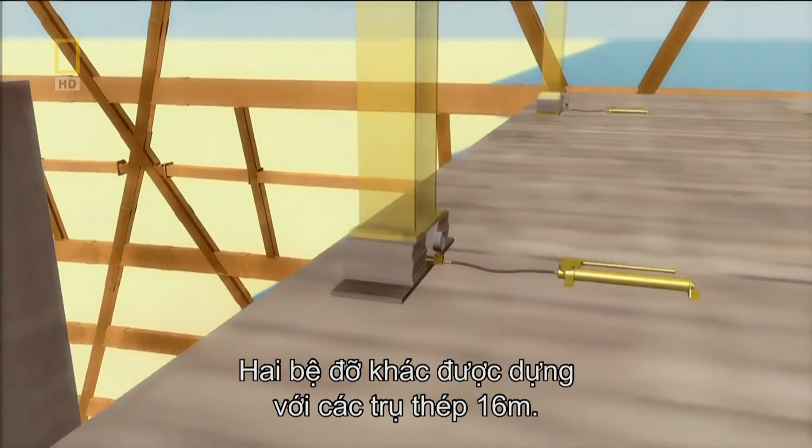To lift the roof arch, 2 hydraulic jacks are positioned on top of a load-bearing wall, carrying 80 tons of weight into the core. 2 more jacks are propped with 16-metre-tall steel columns and channel 40 tons each into the concrete floor of level 23. The props are packed with steel slabs to hold the roof in position as the jacks are raised.

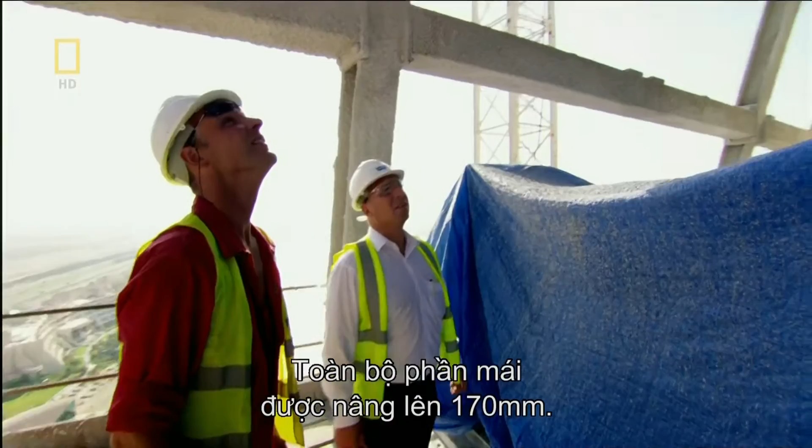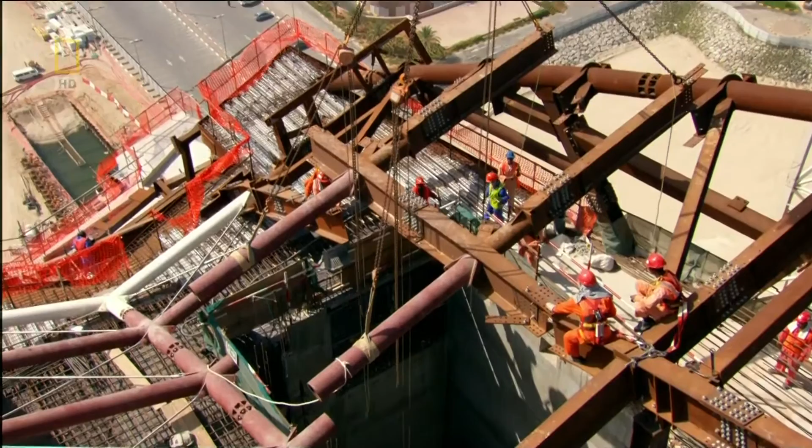The roof was moving firstly a couple of millimetres, then 5, then 10, then gradually into its position 20, 50, 100, and then into its final position 150 millimetres. The entire roof is raised by a whopping 170 millimetres. The slumped arch is finally in the right position. All that remains is to lift the last steel section. It's a tight fit. With a millimetre to spare, the roof is finally complete.

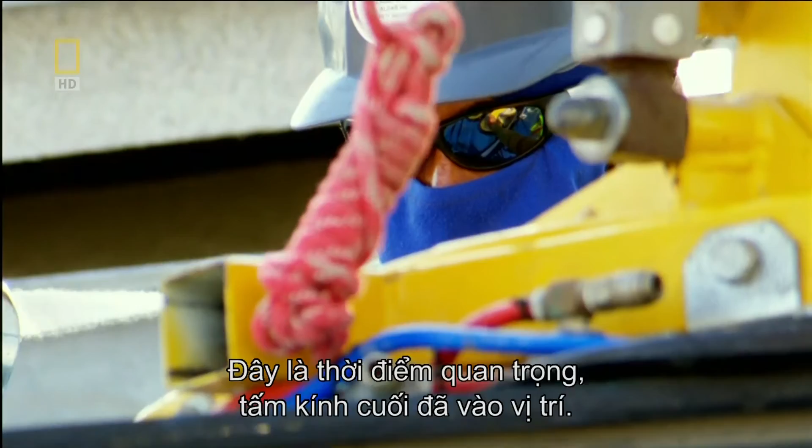With just weeks to spare before Abu Dhabi's first Formula One motor racing spectacle hits town, all of Aldar HQ's 25,000 glass triangles are in position, except one. The glass installation team lower the pane inch by inch. No one wants to be responsible for shattering the last sheet of glass. It's a defining moment for the team. Finally, the last pane slots into place.

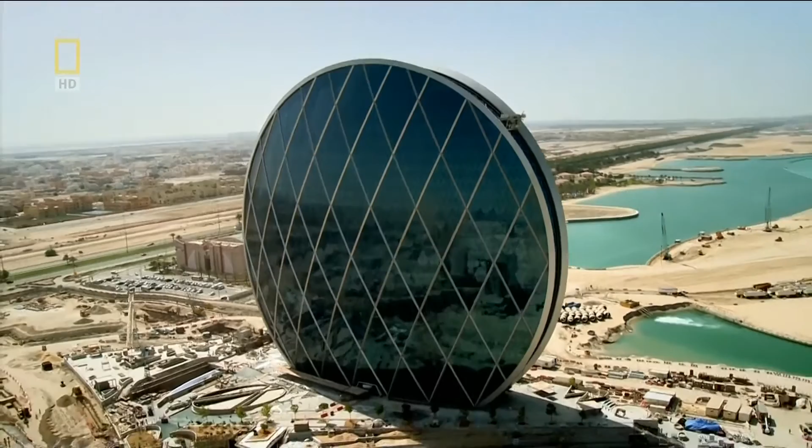Ecstatic. And actually see the last bit of glass go in. Amazing feeling. Hopefully the guys here feel the same way, and I'm just overjoyed. Against all the odds, and in just 30 months, the team have fulfilled their brief. An engineering triumph. This is Aldar HQ. This circular skyscraper, a world first, rises 125 meters above the Abu Dhabi sands.

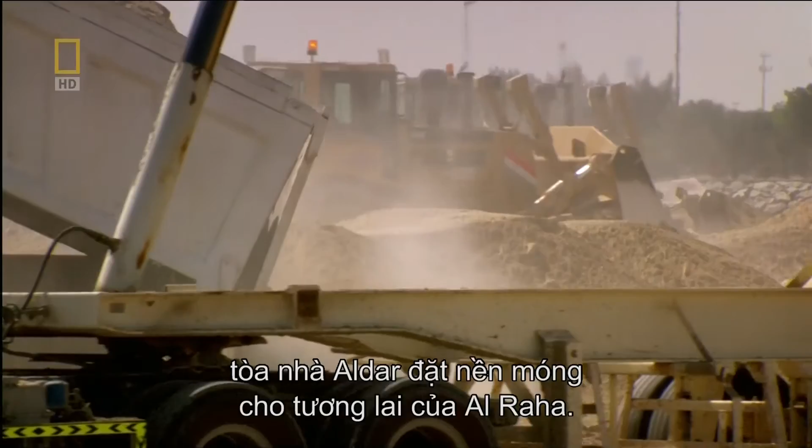It is really a work of art. It's a stunning building. To me, it feels like it should be in a museum. The space is unbelievable. It's really a colossal building. When you come up front to it, it's even bigger than you even imagined. And for it to come from paper to that, it's great. Already an icon on the Abu Dhabi skyline, Aldar HQ should lay solid foundations for the future of Al Raha Beach. Architect Marwan Zgheib is delighted to see his concept sketch come to life.

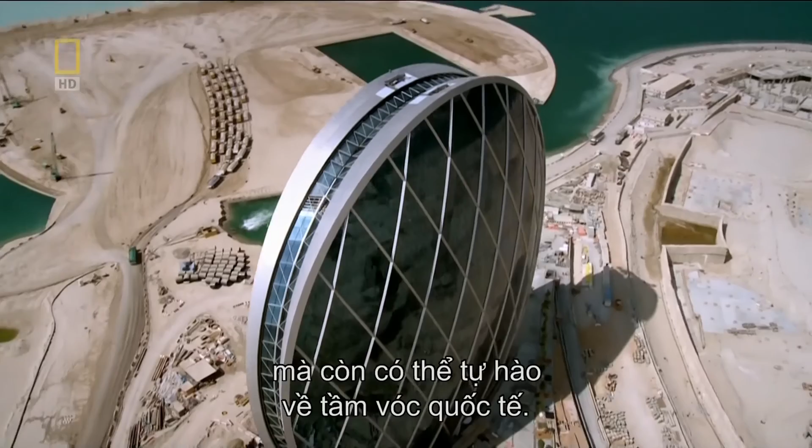The building is more beautiful than the original idea because it's real now. It's no longer a simple concept. It's become reality. Aldar HQ is a structure that rivals not just Dubai's iconic buildings, but can stand proud on the international stage. The HQ building has really put Abu Dhabi on the world map. If you ask me today, we're not yet into the world of Singapore or New York or Paris or London. Will we get there? I absolutely believe we will.